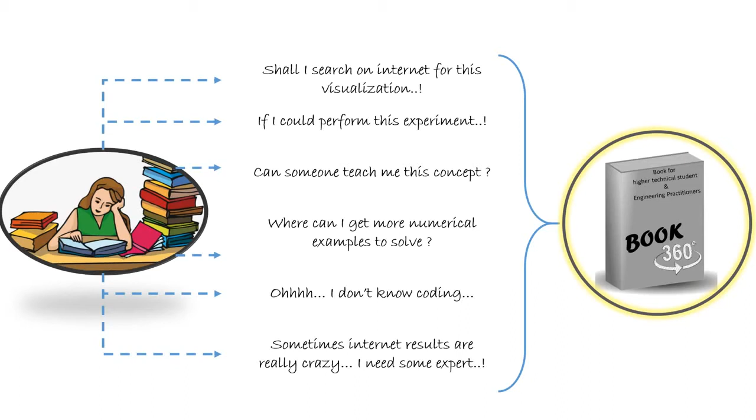When we read a book, there are several reasons for getting interrupted. When this interruption is because of the technical expectation from some source, it must be fulfilled. Book 360 empowers the reader to find answers to their expectations from the authentic experts and the authors. We attempted to transform one of our own books to Book 360. This is a book titled as Machine Tool Reliability. Here we are demonstrating our work to make this book, Book 360.

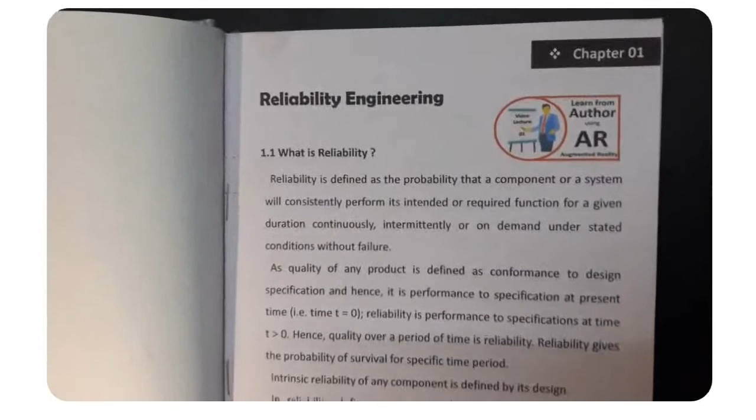The first chapter in this book is Reliability Engineering. Can a student start learning by reading the book along with viewing the video lecture from the author? Yes. Taking your mobile or tablet camera near to this logo will get you to a video lecture where the author is teaching you the same content written on that page. Like this.

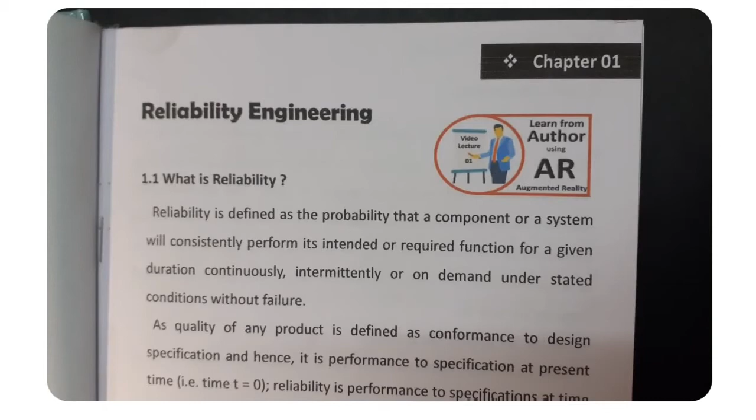Good morning. Today we will discuss about the introduction to reliability engineering. Let us see what is reliability.

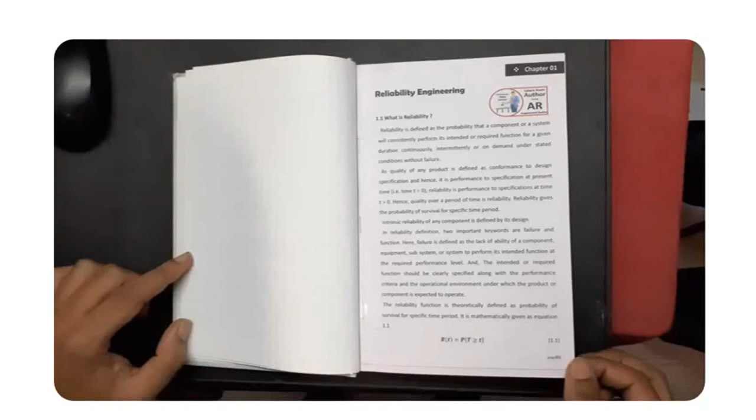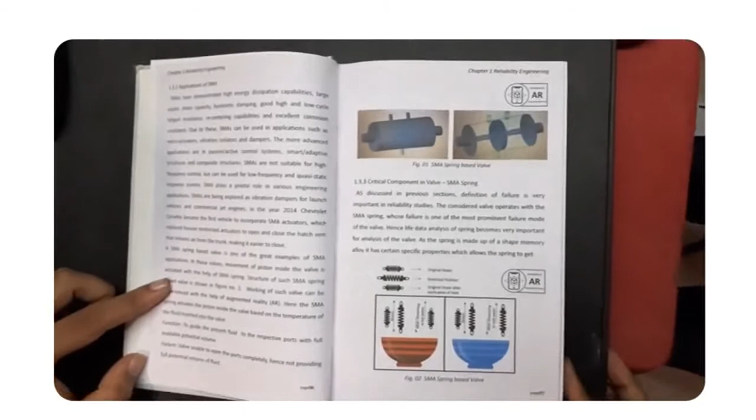Reliability. Now as the student has seen the video lecture, he or she can move forward to the further content. Here, in the book, concepts like life data analysis are covered. In this section of SMA applications, diagram of one valve is given. Can we visualize that diagram for its working? Yes. Just pan your camera of mobile phone or tablet to this logo of AR and it takes you to the fantastic visualization. Like this.

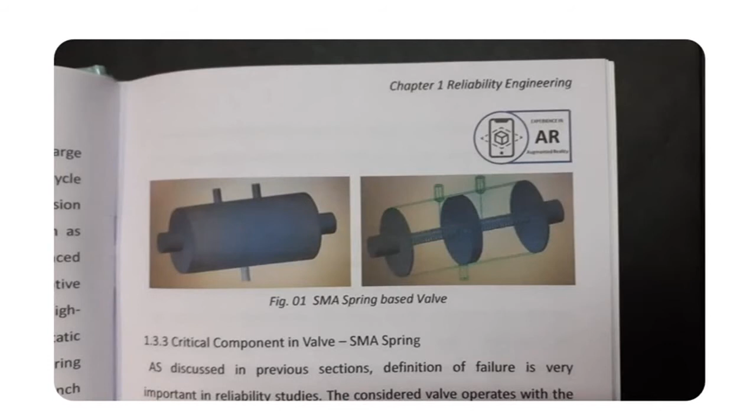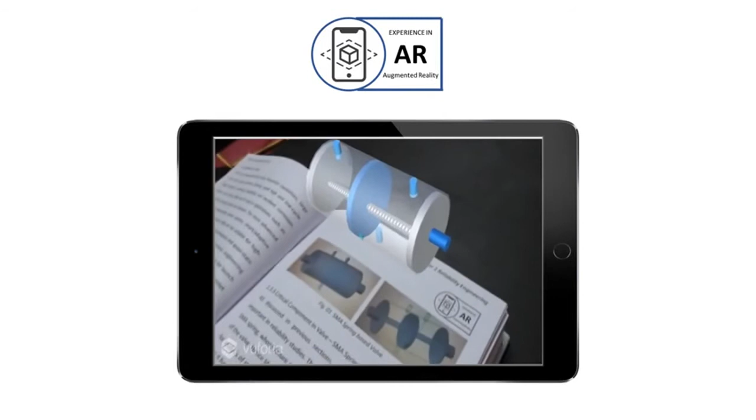When cold water comes from inlet, it gets directed to the cold outlet with the help of position of piston and ports. When hot water starts coming inside and touches the SMA spring, it gets retracted and the flow of hot water gets deflected to the other port.

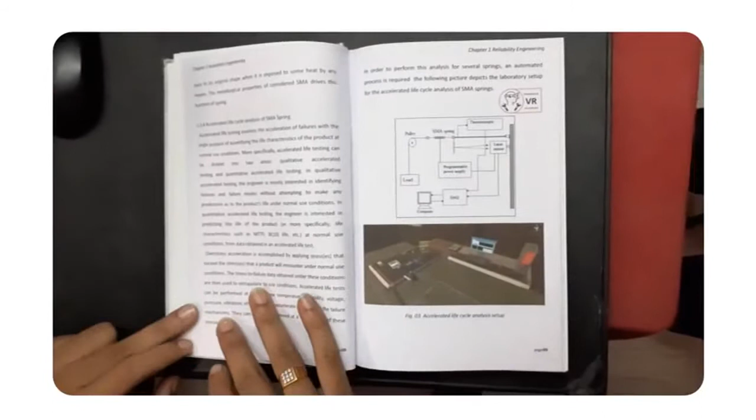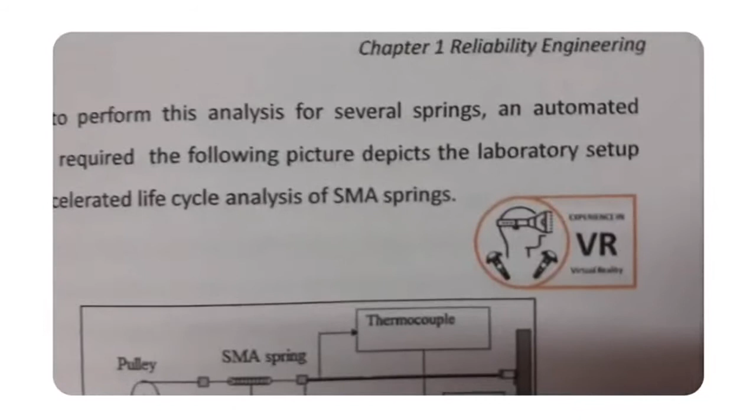Going further, the author here has described one experimentation setup for life data collection using accelerated life testing. Although the description is really good, having hands-on with the setup will be really a great learning. Can we do that without having or going to any laboratory? Yes. Virtual reality can help you in this.

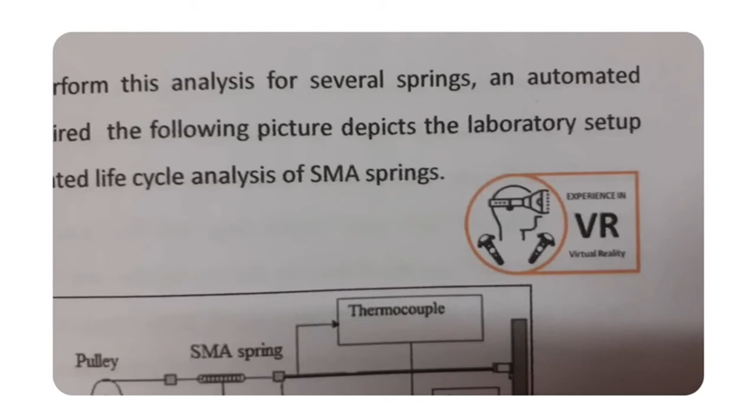Welcome to Reliability Engineering Lab. This is a laboratory setup for performing life tests of shape memory alloy springs. Here you can perform accelerated life test of SMA springs by running several same springs to their failure. On the computer screen, displacement as spring actuation can be viewed along with the collected failure dataset. A programmable power supply is used here to supply voltage for actuation of the spring.

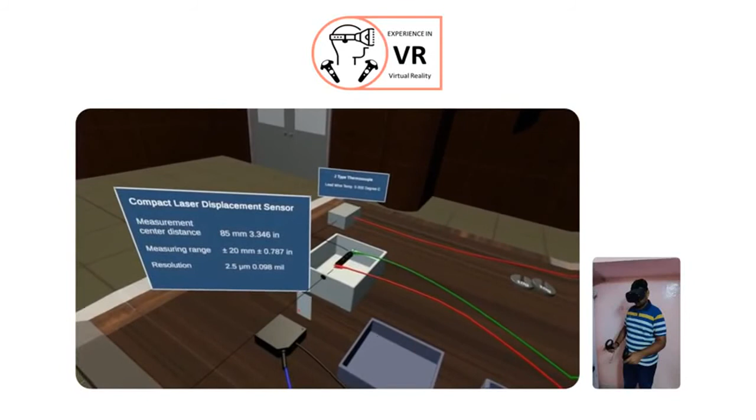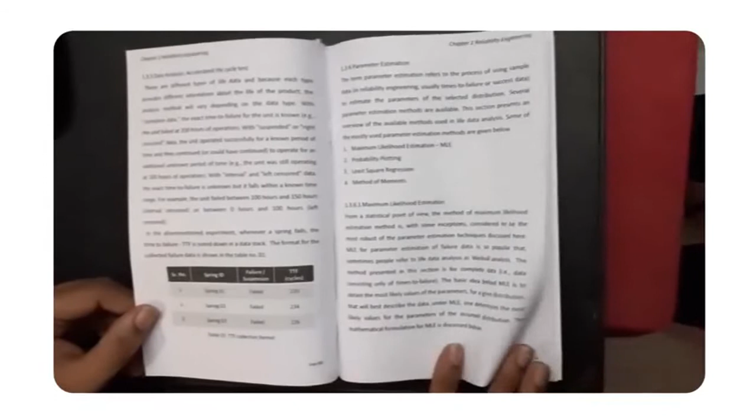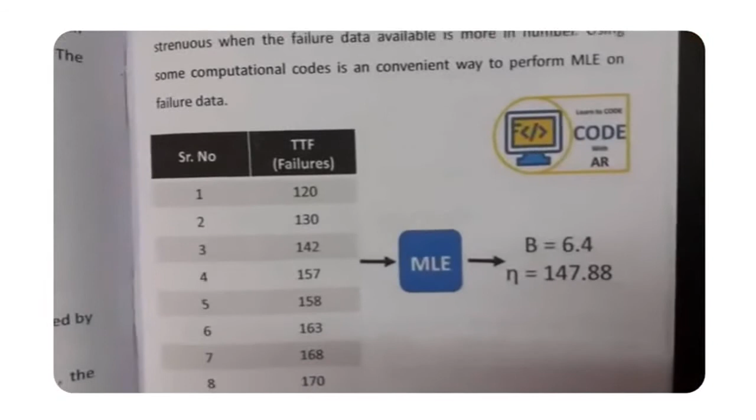After the data collection process, the author has explained here the parameter estimation process. Although the author has properly explained the mathematical part involved in it, solving the numerical problems is important. The author has recommended to use computer programs for this. Can this book teach us coding? Why not? Just take your camera to this logo, and see.

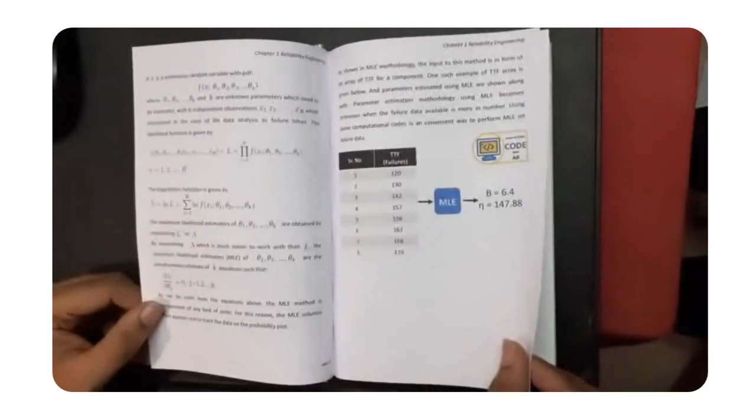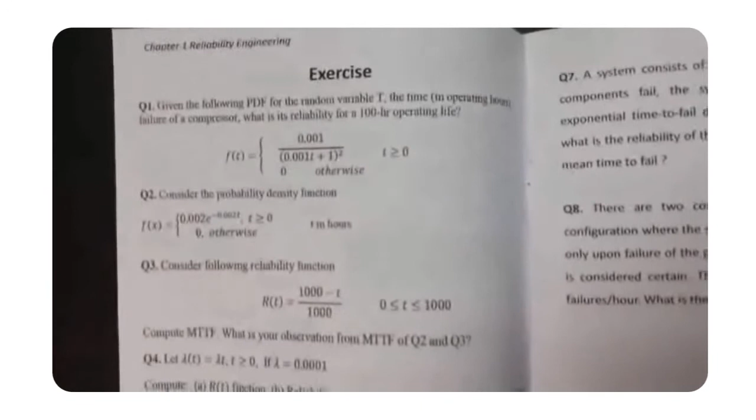Great. Here the chapter is about to end, so the author has provided some of the numerical questions to exercise. You can get help in solving these exercise questions with the help of AR, where the author will help you to understand and solve the given question. The chapter ends here. The questions provided end here. But, does the learning end here?

Our attempt to provide a bridge in between what the author wants his readers to read and understand and what the reader expects from the author apart from a book is what we call Book 360.